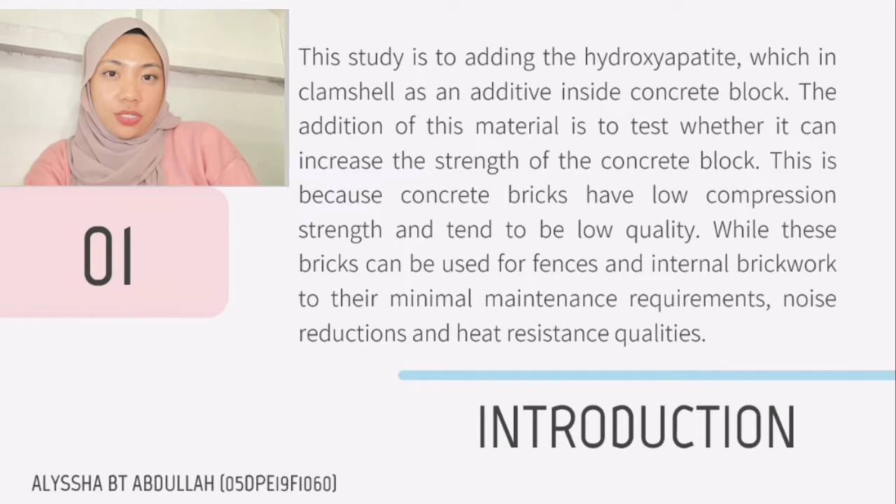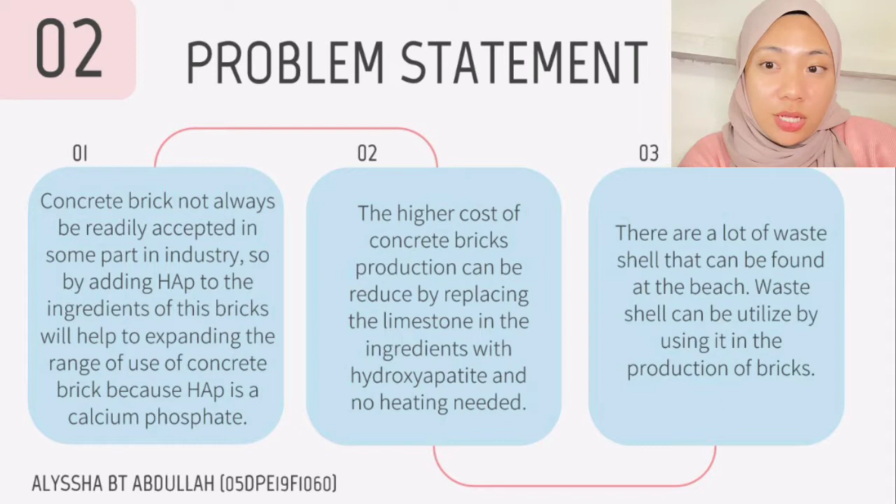Next, I will proceed to problem statement. The first one is HAP is a calcium phosphate, so by adding it to the concrete bricks ingredient, it will expand its range of uses. The second one, the higher cost of producing concrete bricks can be reduced by replacing limestone in the ingredient with hydroxyapatite, which requires no heating. The last one is at the beach, there are numerous waste shells to be found, so we can take the waste shell by using it to make bricks.

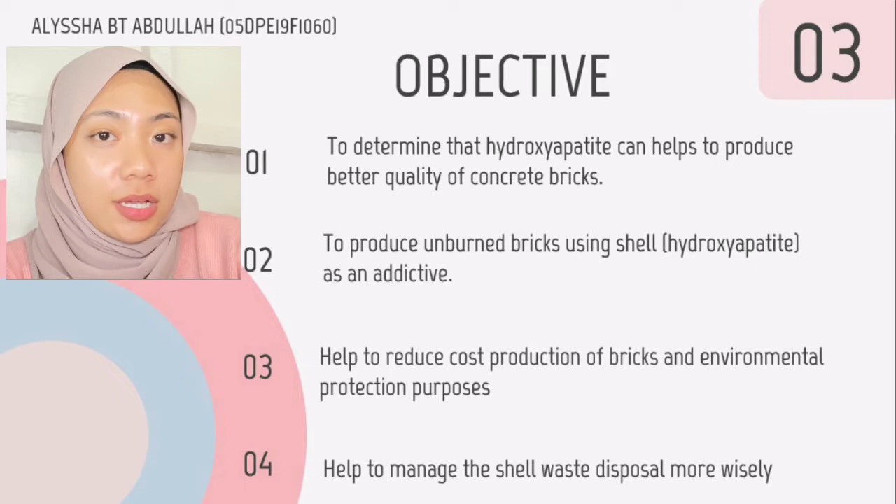So the next one is objectives of this project. The first one is to determine that hydroxyapatite can help to produce a better quality of concrete bricks. The second one, to produce unburned brick using shell, which is hydroxyapatite, as an additive. The last one, help to reduce cost production of bricks and for environmental protection purposes.

As for scope and significance of this project, there are 5 of them. The first one, the strength of the bricks after adding the hydroxyapatite. The second one, infiltration rate after hydroxyapatite is added. The third one, comparison between burned bricks and unburned bricks. The fourth, synthesis of calcium carbonate to calcium phosphate. And the last one is the characteristic of shell used in this study.

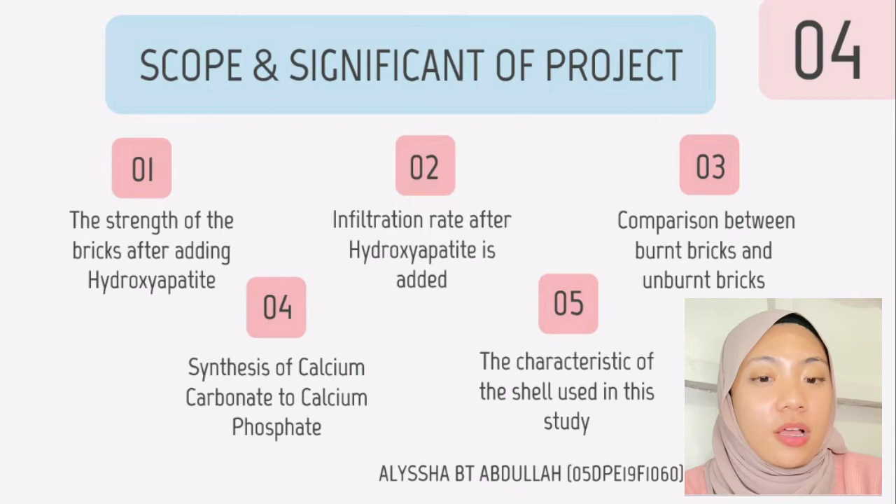The shell has calcium carbonate. The nature of that, just as lime, makes it suitable for use in construction, where if shells are mixed into the bricks mix, it can increase the strength in the mixture. The calcium carbonate helps to increase the early strength due to the accelerator effect and high rate of hydration which hardens the concrete. With the calcium carbonate addition, it exhibits lower strength as compared with concrete without calcium carbonate, but still within the target strength. Brick is one of the most durable construction materials available. They are a low maintenance option for most types of buildings, but they are susceptible to extreme weather conditions.

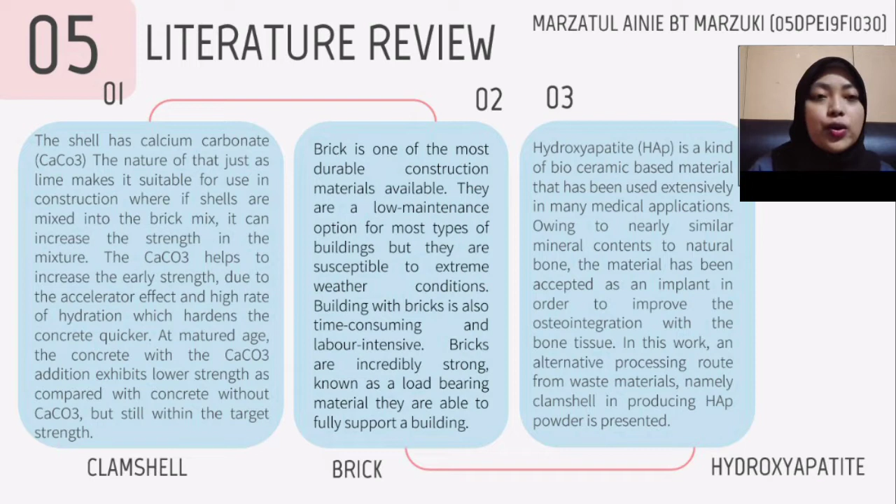Building with bricks is also time-consuming and labor-intensive. Bricks are incredibly strong, known as load-bearing materials. They are able to fully support a building. Hydroxyapatite is a kind of bioceramic-based material that has been used extensively in many medical applications. Owing to nearly similar mineral contents to natural bone, the material has been accepted as an implant in order to improve the osteointegration with the bone tissue.

In this work, an alternative processing route from waste materials, namely clamshell, in producing hydroxyapatite powder is presented.

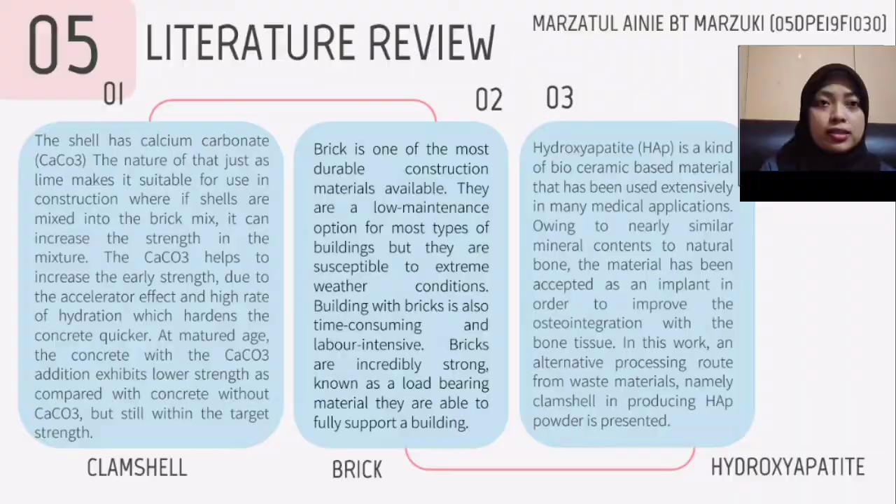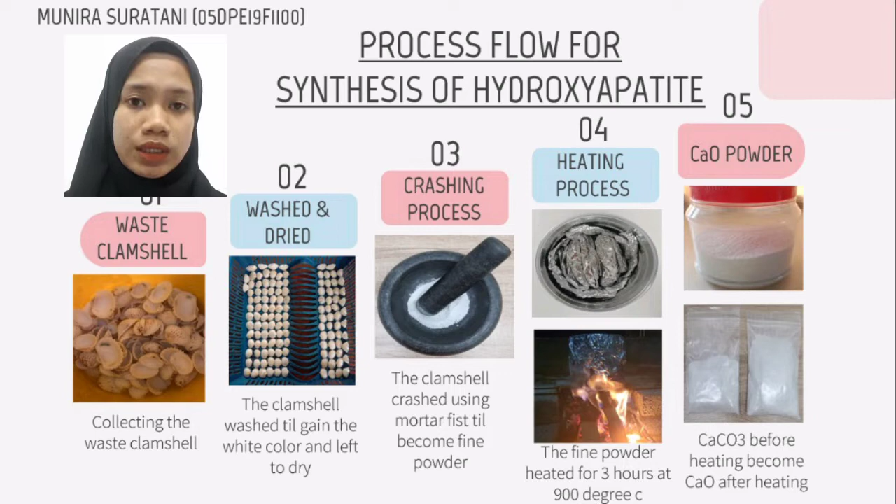I'm going to talk about the methodology. Here's the process flow for synthesis of hydroxyapatite. Firstly, we collect the waste clamshell and then we wash it till we gain the white color of its surface, and we leave it to dry. After that, we crush the clamshell using a mortar and pestle until it becomes fine powder. Then the powder that we gain, we heat for 3 hours at 900 degrees Celsius. After the heating process, the powder that we gain is known as calcium oxide powder.

This is the process flow to gain hydroxyapatite slurry. 57 grams of calcium oxide powder mixed with 1 liter of distilled water, and 41 ml of phosphoric acid were poured little by little into the mixture. The mixture is stirred for 30 minutes. Then the mixture is tested till it gains a pH range of 6.5 to 8.5. After that, the mixture is left for 9 hours. After 9 hours, the slurry can be seen at the bottom of the mixture, and the mixture at the top will be removed, and then the hydroxyapatite slurry is gained.

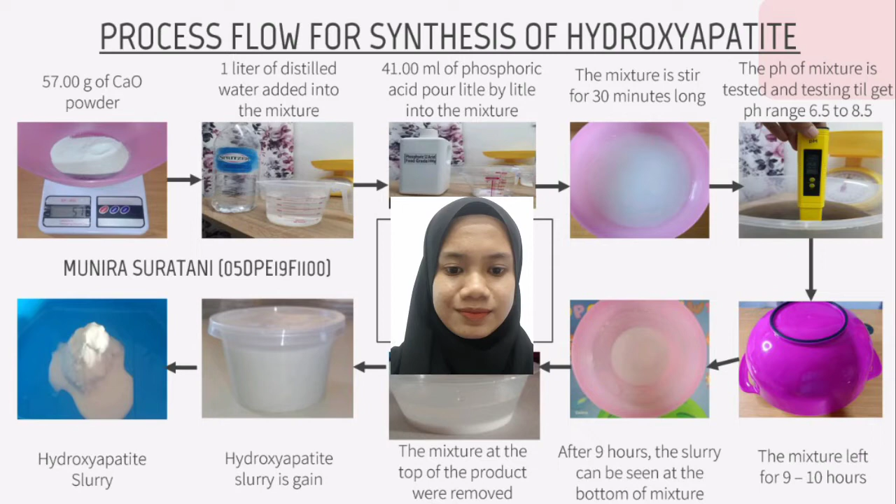Next, process flow for concrete brick. We are doing concrete brick grade 20P with a ratio of 1 to 2 to 4, with 300 grams of cement, 600 grams of sand, and 1200 grams of aggregate. The length of the mold is 21.5 cm, height is 6.5 cm, and width is 10 cm.

The brick sample that we're doing is sample A, containing 300 grams of HAP slurry to replace the cement ratio, with 600 grams of sand and 1200 grams of aggregate. For samples B and C, both use 200 grams and 100 grams of HAP slurry respectively, with the same ratio of sand and aggregate.

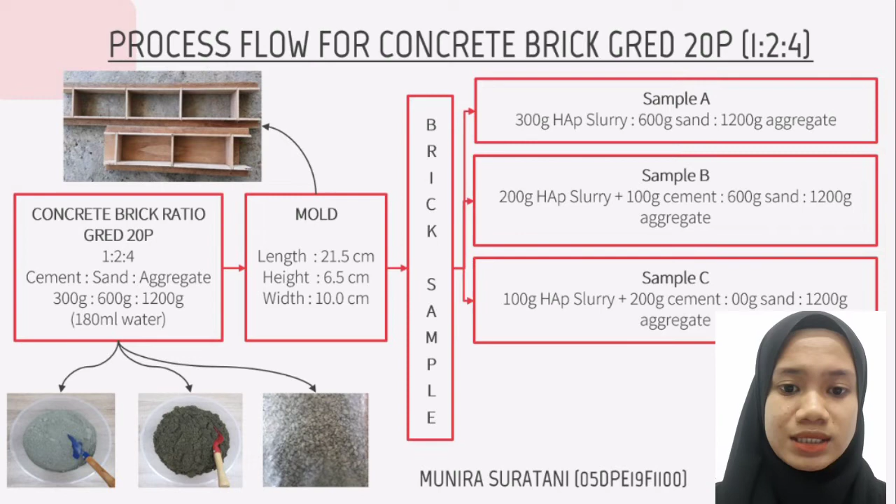For the 7-day sample A, the compressive strength is 35.62 Newton per millimeter square. For the 14-day sample A, 43.94 Newton per millimeter square. For sample B 7-day, 24.2 Newton per millimeter square. For the 14-day sample B, 36.32 Newton per millimeter square. For the control point brick 7-day, 44.31 Newton per millimeter square. For the control point brick 14-day, 48.33 Newton per millimeter square.

For the discussion, we can assume that the concrete brick with the hydroxyapatite mixture exhibits lower strength compared to the control point brick, but it can still replace the control point brick. For example, sample A at 14 days has almost the same strength as the control point brick at 14 days.

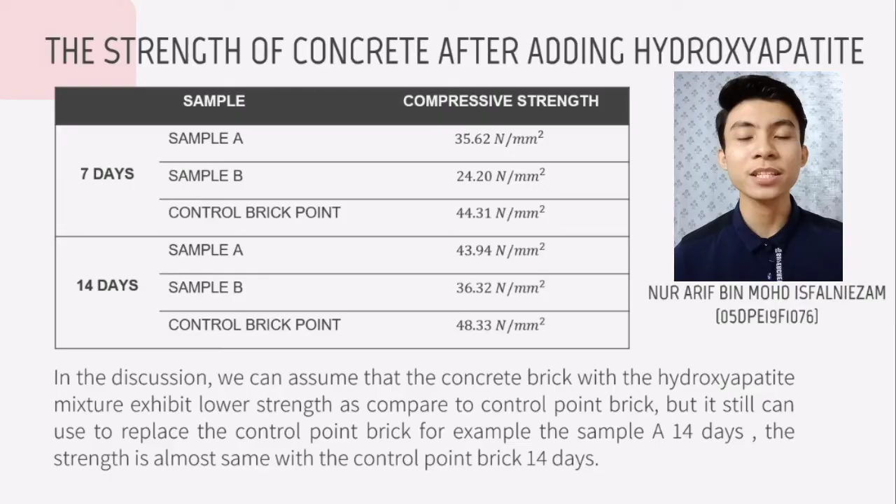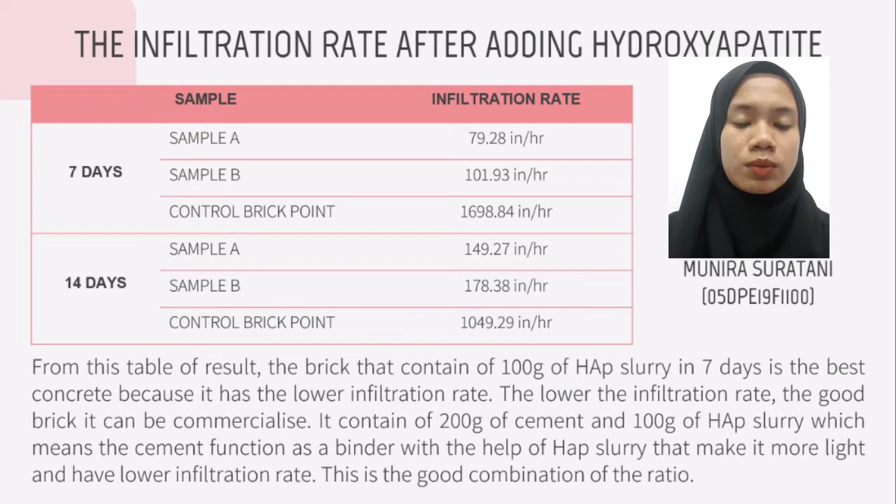From the result, the brick containing 100 gram of HAP slurry in 7 days is the best concrete because it has the lower infiltration rate. The lower the infiltration rate, the better the brick can be for commercialization. It contains 200 gram of cement and 100 gram of HAP slurry, meaning the cement functions as a binder with the help of HAP slurry, making it lighter with a lower infiltration rate. This is the right ratio combination.

Here is the synthesis of hydroxyapatite. Materials containing calcium carbonate can be used to produce calcium phosphate, and can be found in clamshells. Chemical precipitation method can be used to produce calcium phosphate by reacting calcium carbonate with phosphoric acid.

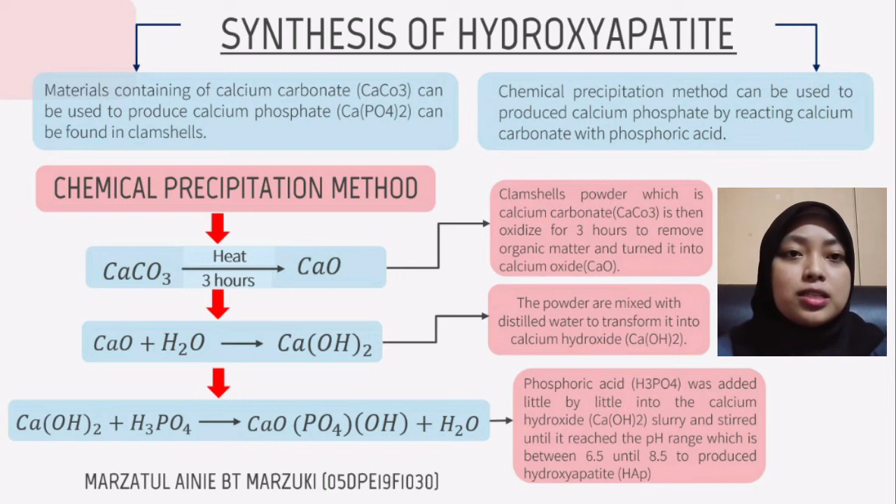Here is the chemical precipitation method. Clamshell powder, which is calcium carbonate, is oxidized for 3 hours to remove organic matter and turn it into calcium oxide. The powder is then mixed with distilled water to transform it into calcium hydroxide. Finally, phosphoric acid was added little by little into the calcium hydroxide slurry and stirred until it reached the pH range between 6.5 and 8.5 to produce hydroxyapatite.

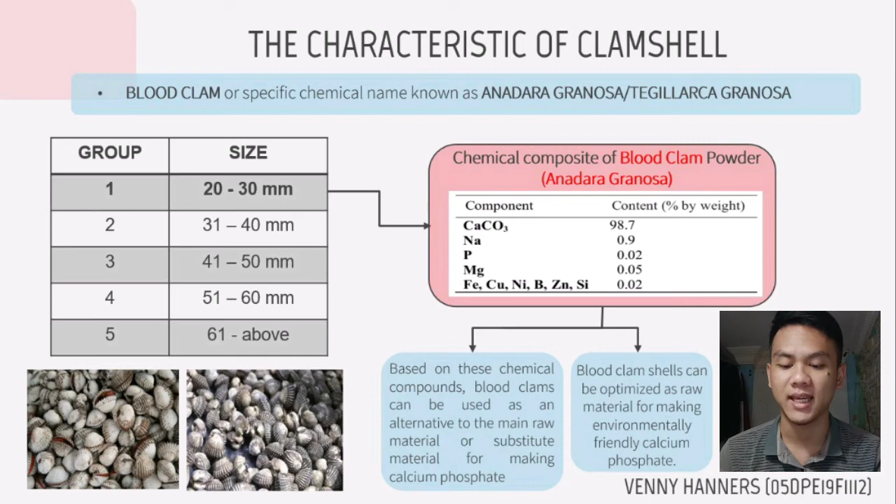The chemical composition of blood clamshell: 98.7% content of calcium carbonate, 0.9% contains natrium and other components. Based on this chemical compound, blood clam can be used as an alternative raw material for making calcium phosphate.

Hi, I'm Alyssha, and I will present the result and discussion for the third scope, which is the comparison between burned brick and unburned brick. As you can see from the figure above, it shows that concrete brick is lighter than burned brick.

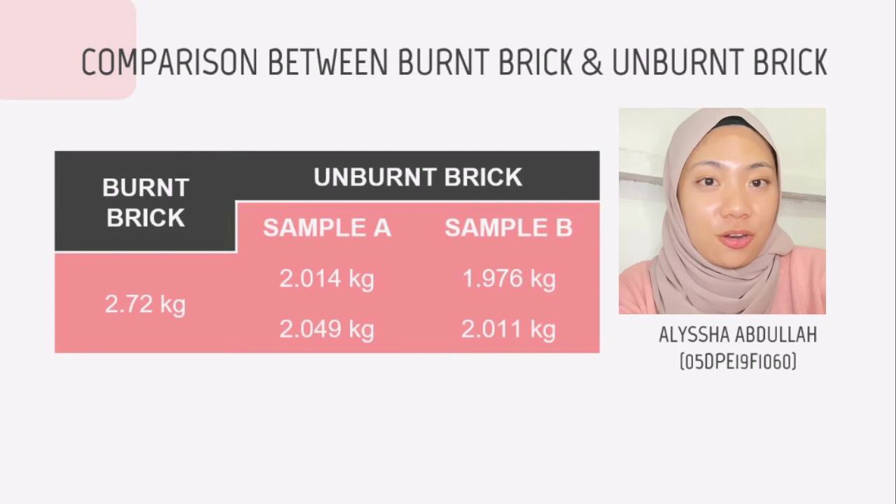As you can see, the table above shows that the burned brick is much heavier than the unburned brick. The burned brick is 2.72 kg. For the unburned brick, sample A is 2.014 kg, sample B is 1.976 kg. That is the result for 7 days. Meanwhile, for 14 days, sample A is 2.049 kg and sample B is 2.011 kg.

As a conclusion, brick that contains hydroxyapatite as an additive can produce better quality of brick in terms of its infiltration rate. It can be seen that brick containing HAP slurry has a lower infiltration rate than the control brick point, while in terms of strength, brick containing hydroxyapatite slurry has lower strength compared to the control brick point. However, sample brick containing hydroxyapatite is lighter than the control brick point, and it also has a whiter and smoother surface.

Besides, this project can produce unburned brick containing hydroxyapatite slurry as an additive. Furthermore, by using hydroxyapatite slurry, we can reduce the cost of cement if it is produced in large quantity, and also achieve the objective of environmental protection purpose because we are using waste clamshell.

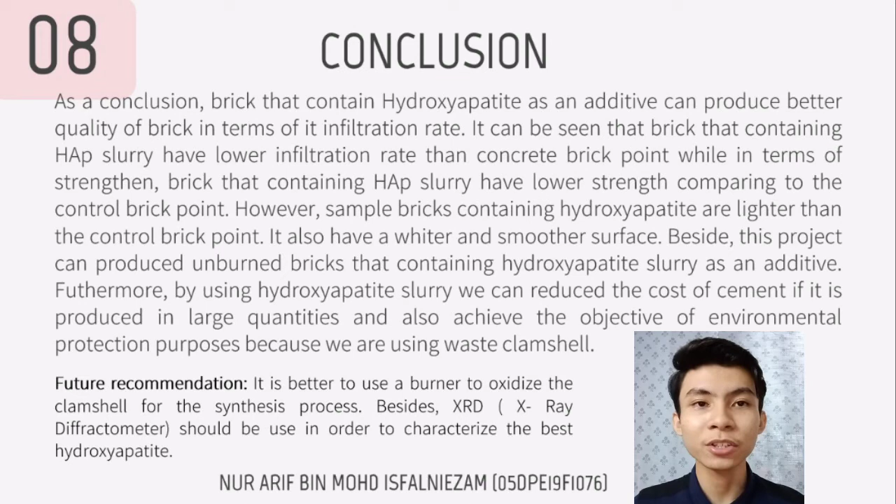For future recommendation, it is better to use a burner to oxidize the clamshell for the synthesis process. Besides, an XRD X-ray diffractometer should be used in order to characterize the best hydroxyapatite.

Summary of cost for the project. We use 8 items or components. Number 1 is clamshell. Number 2 is 4 kg cement. Number 3, 11 kg sand. Number 4, 22 kg aggregate. Number 5, 17 liter distilled water.

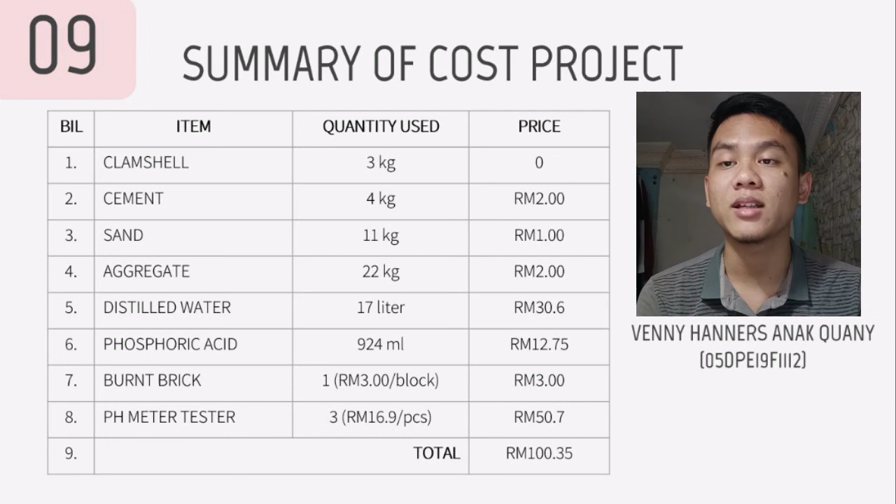Number 6, 924 milliliter phosphoric acid for synthesis. Number 7, 1 block burnt brick for the comparison scope. Number 8, 3 pieces pH meter tester. The total is 100 ringgit and 35 cents.

We use 6 block bricks to test the strength of brick for the strength scope. There were 2 sample A, 2 sample B, and 2 control brick point. The total cost is 216 ringgit, and the overall cost for this project is 316 ringgit and 55 cents.